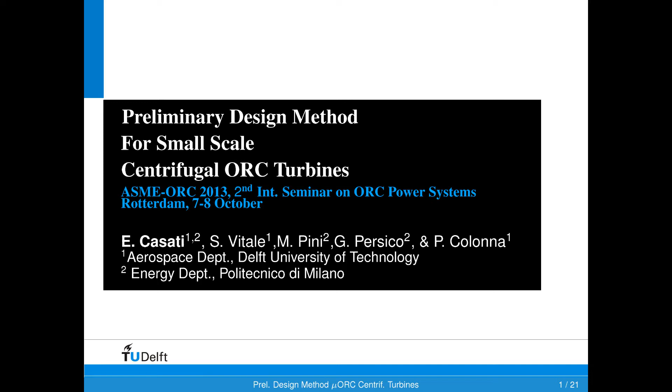Presenter, Mr. Emiliano Casati. Mr. Emiliano Casati graduated in Energy Engineering from Politecnico di Milano in 2008. Since then, he is involved in a double PhD program between Technical University of Delft in the group of Professor Colonna and Politecnico di Milano in the group of Professor Dossena.

His research is focused in the ORC field, innovative concepts and modeling methodologies, and he is giving us a presentation titled Centrifugal Turbine for Mini ORC Power Systems.

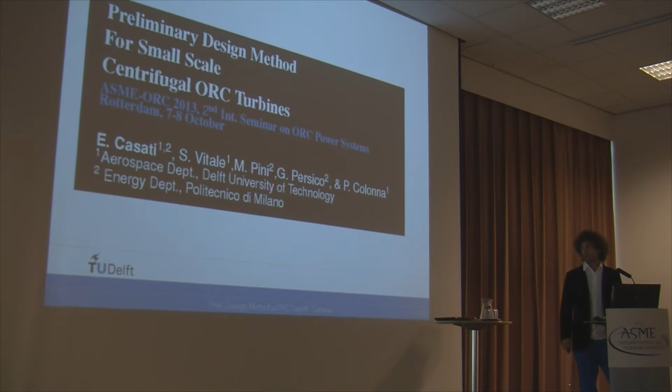This is a brief outline of my presentation. I will start with the introduction, and then the rest is invisible, so I'll just go.

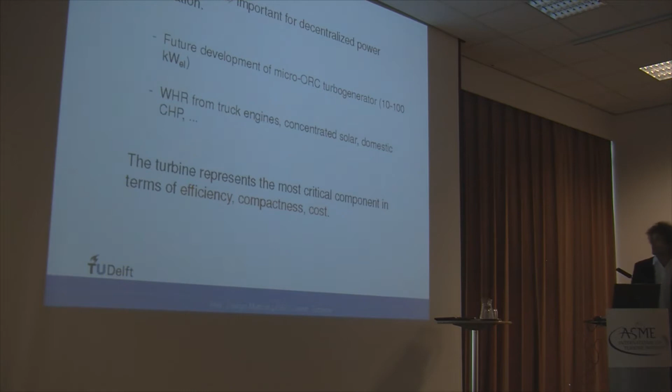First of all, a few words regarding ORC power systems. As you know, we have seen a lot of presentations talking about decentralized power. So this means the development of relatively small-sized turbomachinery in this power range, 10 to 100 kilowatt electrical, for a number of applications. And of course, the turbine represents the most challenging component under a variety of points of view.

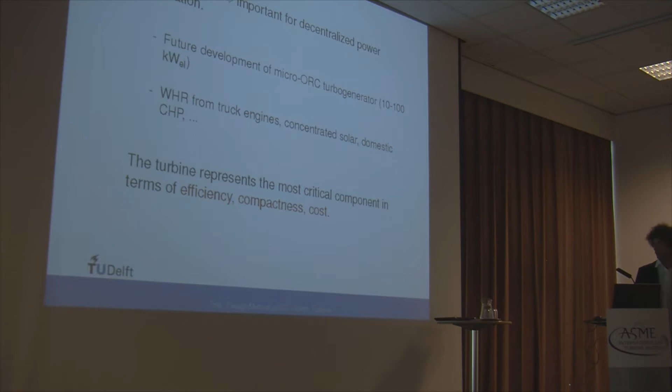So what about ORC turbines, briefly? The use of complex and heavy molecules as a working fluid, and this is the reason why this whole field was initially started, allows for a simple turbine. Simple layouts, compact turbines, reliable, mainly because the specific work, the enthalpy drop across the expansion, is typically much lower than for a simpler fluid. So the number of stages can be reduced, and the peripheral speed of the machine can also be reduced.

Of course, we have drawbacks, and the drawbacks are mainly related, as we already know from this morning, to the variation in volumetric flow rate from the first stage to the last stage during the expansion path. And of course, the speed of sound of these fluids being typically low, we also have to cope with transonic or supersonic flows in the machine.

Then another disadvantage for the designer is the unavailability of charts based on similarity rules, such as those that we have for axial machines. So there are several paths of research of interest, which are the development of non-conventional turbine architectures, as we have just seen from the previous presentation, and the interest in having reliable preliminary design tools, like 1D tools, for the sizing and the selection of the basic parameters for these kinds of machines, the variety of applications, working fluids and operating conditions being basically infinite.

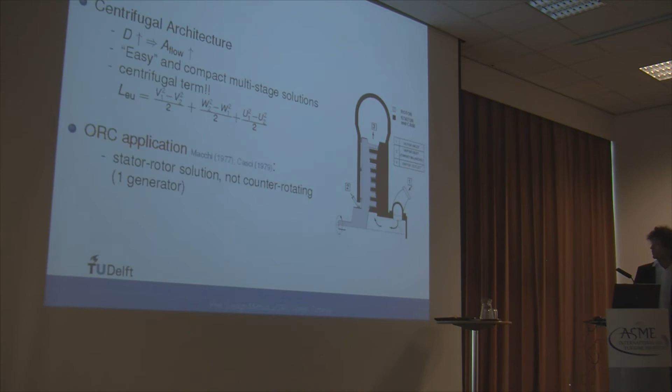The application of this kind of machine for ORC power systems dates back to the 70s, basically in Milan, with the work of Professor Macchi, and Professor Corrado Casci in his textbook. And the main advantage in ORC applications is that, the specific work being comparatively low, you can use a stator-rotor solution, you don't need a counter-rotating solution, as was the case with the Ljungström steam turbines. So basically from here comes the interest.

And this is the code we developed, which is called zTurbo. It's mainly developed at Politecnico di Milano by Matteo Pini, who is also here. It's basically a code written in Fortran, which allows for the selection of the basic design parameters for ORC turbines, and provides the necessary boundary conditions for a proper machine optimization, because, as we also saw in previous presentations, CFD is a fundamental tool for the optimization of the machine, but of course you have to start from a geometry which is already kind of optimal.

And so the only way to optimize these basic design parameters, like the number of stages, velocity triangles, meridional channel shape, and so on, is a simplified tool such as a 1D tool. What we developed is a code which allows for a, let's say, rigorous approach, meaning that we rely on a multivariable optimization. And the main features are the treatment of real gas, which is performed with a lookup table approach to enable fast and accurate calculations.

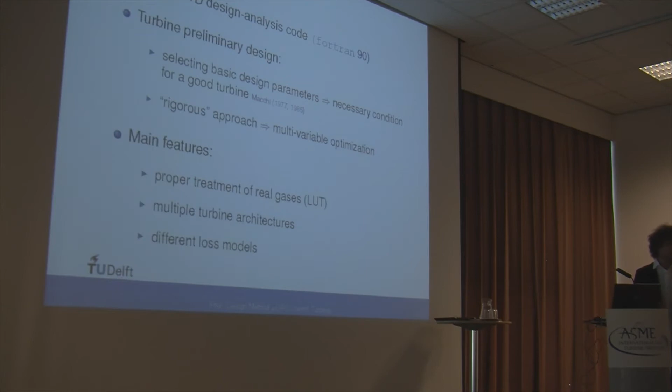Of course the tool is flexible from the point of view of turbine architectures, meaning axial flow machines, centrifugal outflow, centrifugal inflow, mixed flow, and so on, and also the loss models that are implemented are multiple.

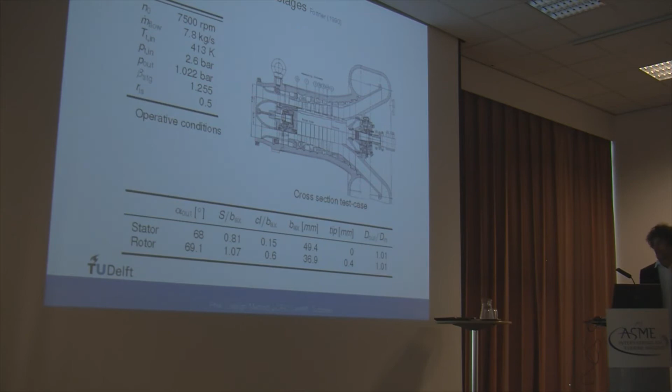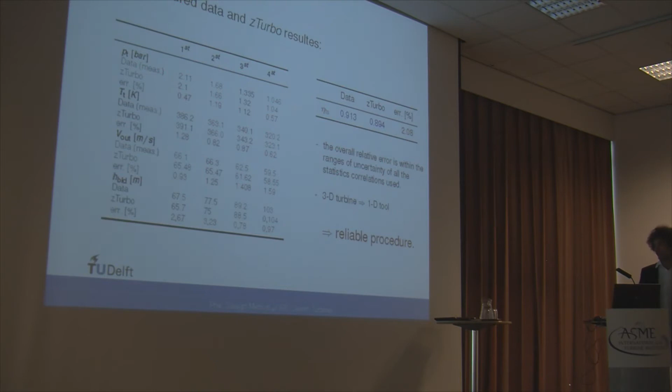Okay, this is regarding the validation. We validated the code based on a multi-stage turbogas test case, which is of course a little bit on the safe side, the machine being much simpler than an ORC one, but this is what was available, and this is basically the result in terms of meridional channel and in terms of efficiency: we get a 2% discrepancy. But as I said, this is the only test case we found in the open literature.

Then regarding the code, basically what zTurbo does is to determine a metric of interest, in this case the efficiency, as a function of multiple geometrical and thermodynamic quantities, but it doesn't solve the optimization problem. To achieve maximum flexibility, the code has been coupled with an external optimizer, which allows for the selection of different objective functions, variables, constraints, and so on, and also the search algorithm. The code is the Dakota optimizer, which is developed at Sandia National Laboratories. You can find it on the web, you can use it, and it works fine.

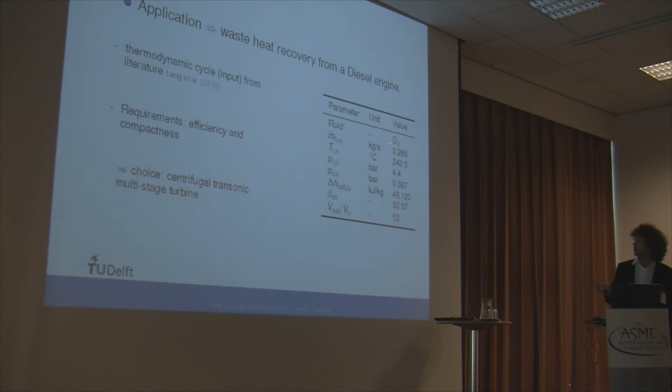Then we applied this tool to the preliminary design of a 10 electrical kilowatt centrifugal turbine. This was the application, and these are the boundary conditions for the design, which are basically the thermodynamic cycle taken from literature, and these are the conditions of such a cycle. As you can see, the expansion ratio is quite high. The working fluid is a siloxane, and we select as an a priori choice a centrifugal transonic turbine, meaning that the Mach numbers are limited to be below 1.1.

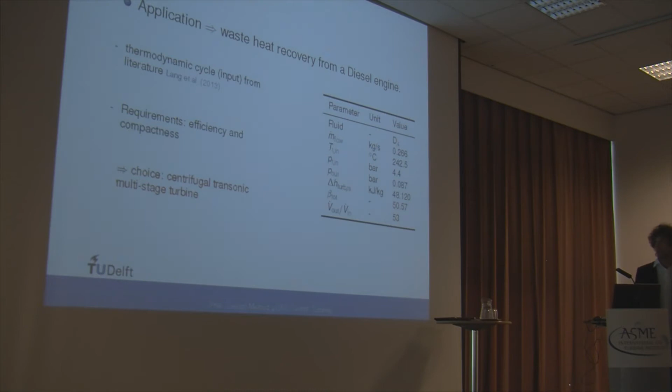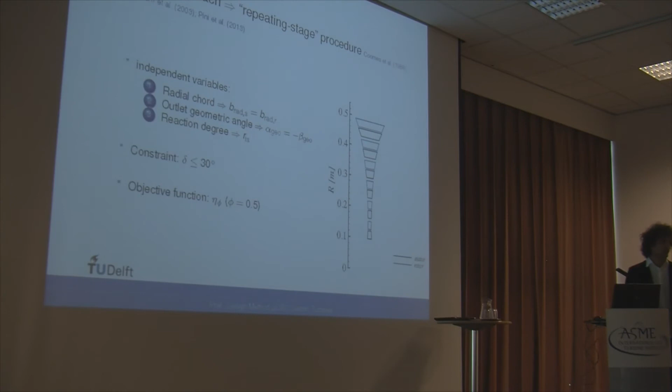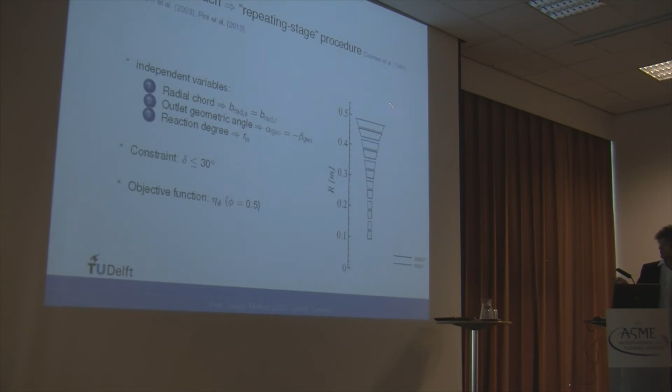And all these works assume simplifying design procedures derived from the practice of axial turbines, such as the repeating stage one. These are the key ingredients of such a simplified procedure, whereby, for instance, the radial chord of all the rows is kept constant, and the geometric blade angles are kept constant. This is a typical meridional channel which results from such a procedure. The key points are that you can end up with a convergent channel in the first stages and with a highly divergent channel with high flaring angles in the last stages.

For small machines, you cannot allow such a trend. Why? First of all, because you cannot allow for a convergent channel, because the blade height is already limited by the small volumetric flow. And secondly, you cannot allow for such large flare angles, because in a 1D approach this is not correctly weighted in terms of performance loss. We know that 3D effects, which negatively impact the performance, arise if we allow for such large flaring angles, as you see here.

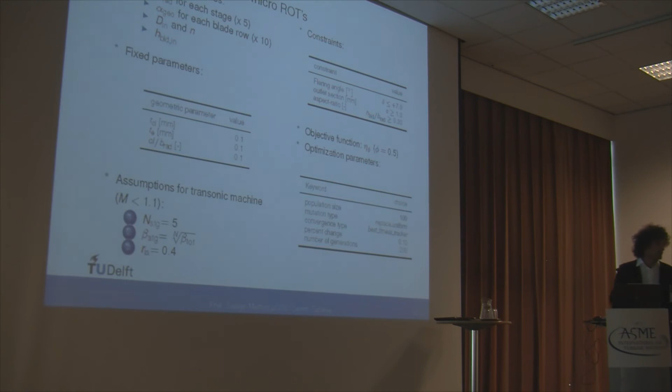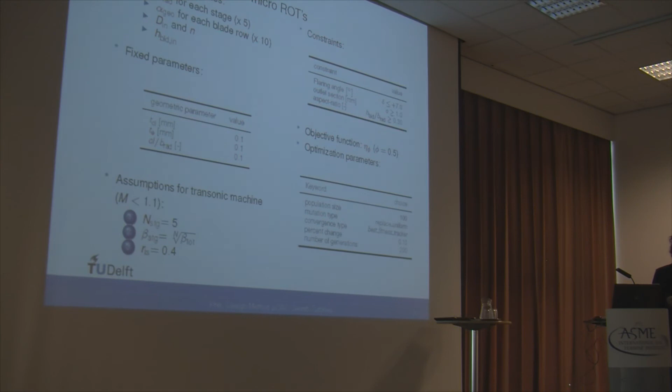And also the flaring angle we constrain to a value which is much lower than you can find in the axial machine literature. We adopted as a search algorithm a single objective genetic algorithm, whereby the objective function is in our case the efficiency, assuming a certain degree of recovery of the kinetic energy at the outlet.

So this is the main result. As you can see, the meridional channel is completely different from what you could get with the standard procedure, let's say. As I said, the radial chords tend to be much smaller in the first stages, and then they get bigger.

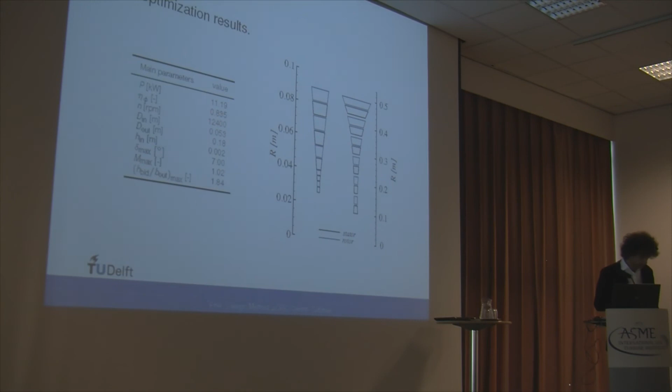And the efficiency we got is in excess of 80%, but again, this is just a fluid dynamic efficiency based on a simplified approach; we use the Craig-Cox method to predict losses, and also the Traupel method for the supersonic case, which I will show later. And an important disclaimer is that we don't know how to account for Reynolds effect when scaling down this kind of turbines. So we also expect a penalty in efficiency for this effect.

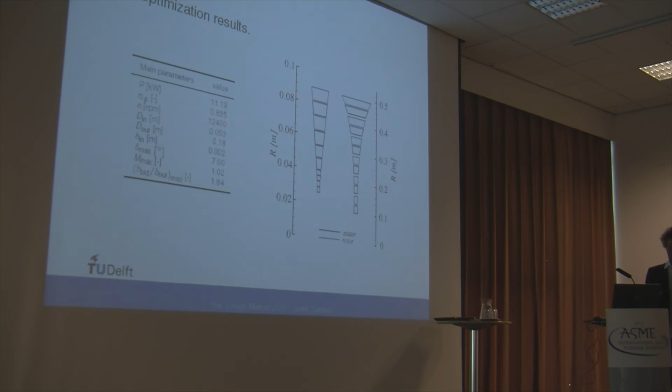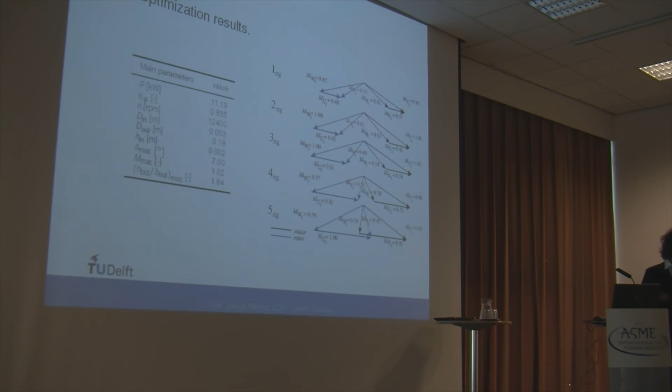As you can see, also regarding the velocity triangles, the first stages tend to be much more loaded than the last ones. Higher deflection, more tangential flows. So basically, the machine is changing completely from the first to the last stage.

Then, just as a term of comparison, we removed the assumption of a transonic machine, reducing the number of stages to 3 stages, of course allowing for Mach numbers in excess of 1, so lower efficiencies. And you can see that the meridional channel shape is still, let's say, quite regular in its development.

Then we compared it with the published results regarding the radial inflow single stage turbine for the same application, of course. And you see that the efficiency we got for the 5-stage case is in excess of 80%, let's say, which is larger than what has been published. But most interesting is the speed of revolution, which is less than half, for the same output diameter.

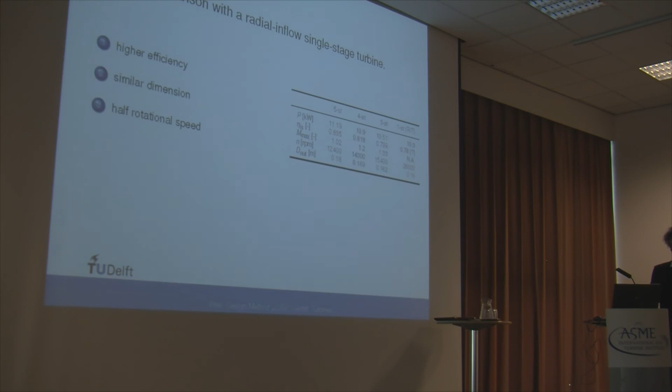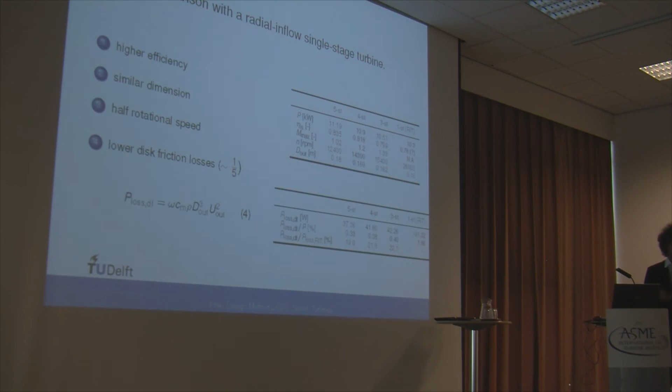And then another term which we didn't account for are the disk friction losses, which we expect to be advantageous for centrifugal machines, since you have basically only one disk rotating at half the speed, and you have a cubic relation with diameter and a quadratic relation with speed. So we expect this to be on the side of our machine.

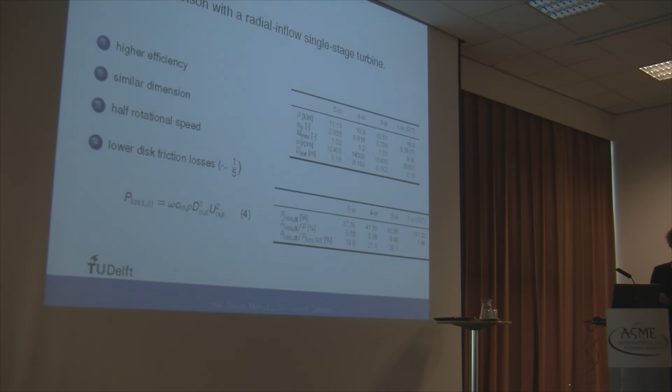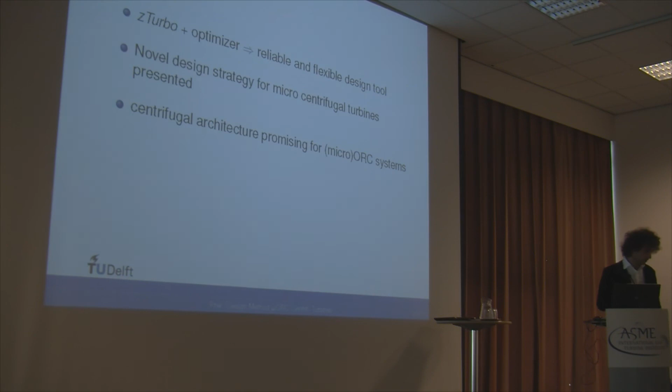So concluding, I presented you this tool we developed, and we already published the description in a previous edition of this conference. We developed a novel design strategy aimed at scaling down the centrifugal outflow architecture. And while this seems, also from the industrial point of view, to be an assessed technology for large machines, we kind of paved the way also for micro machines, and this technology seems to be interesting also in this range of size. That's it.